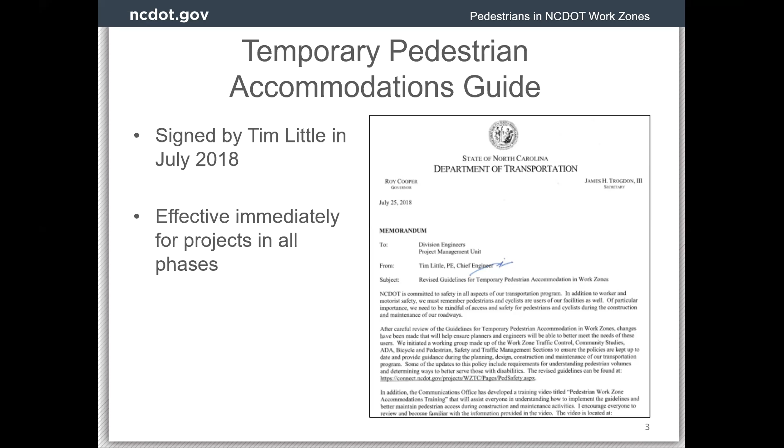The guidance focuses on using the actual level of pedestrians to guide designers towards or even away from specific pedestrian control strategies. It requires active pedestrian movements be maintained throughout construction, and it requires the use of ADA-compliant traffic control devices to close or guide users through, along, or around a work zone. These are also requirements set forth in Chapter 6 of the MUTCD, which states that the TTC, temporary traffic control, if the TTC zone affects the movement of pedestrians, adequate pedestrian access and/or walkways shall be provided.

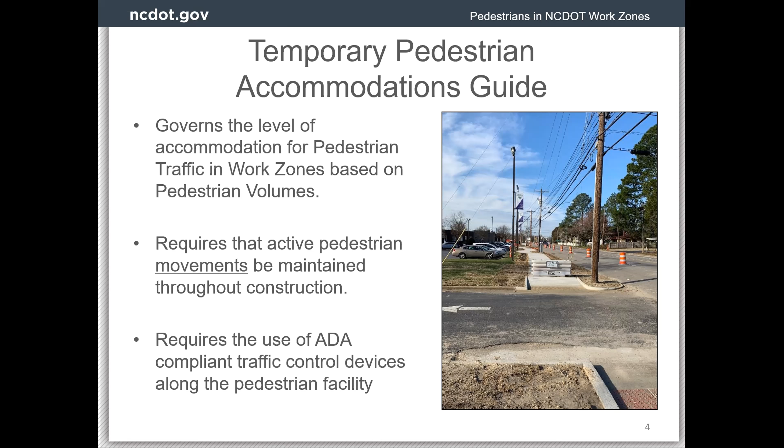So let me elaborate for a minute on pedestrian counts themselves. The intent is that this number is known as early as possible. Some community studies findings will prompt the ordering of pedestrian counts, but they can be requested anytime through the Connect NCDOT traffic safety website. They have to be approved, and are usually turned around in about 2 weeks after approval. Also, we suggest ordering counts when the perceived volume of pedestrians is high, not when it's very low.

So to explain that, we don't expect that every project with an existing facility needs pedestrian counts. If there's a continuous existing facility, the project must follow basic pedestrian requirements at a minimum already. Basic accommodations cover a volume of pedestrians up to 99 per day, give or take. So counts should be ordered when it looks like there may be enough volume to push the project to a higher level of accommodation. But if in doubt, definitely order counts.

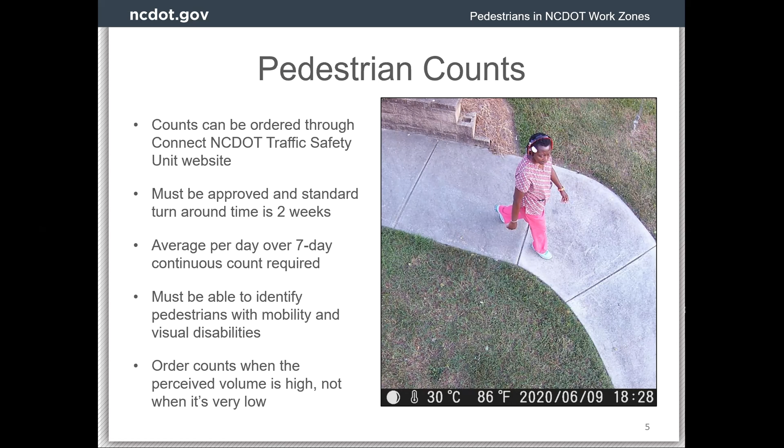So, determining the level of pedestrian accommodation. Once the counts have been completed, based on the volumes, the project will fall into one of 4 levels of accommodation. As you see here on your screen, the levels are absence of need, basic, moderate, and full, and then their corresponding numbers are next to them as well.

Absence of need only occurs when there is no existing pedestrian facility and no evidence of pedestrian activity. But also, if there are any continuous existing facilities, then the project must follow basic accommodations at a minimum, regardless of the activity levels. On this screen, the picture, that red block is the 24-hour average pedestrian volume for a project that had pedestrian counts ordered here in Raleigh. So this is just the front page of that report that the traffic counters send to us.

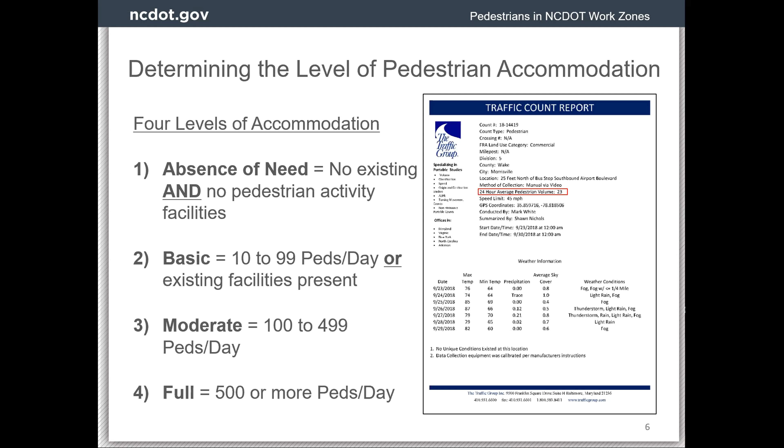I also want to state that the guidelines are currently undergoing an update. It's the first one since 2018, and hopefully it'll be published before the end of this year. The major changes include a clearer definition of determining the absence of need, better guidance for when to and when not to order pedestrian counts, and guidance for the use of audible warning devices in the work zone.

These guidelines were a huge accomplishment by our pedestrian task force, and I do want to take a moment to brag on the force for a minute. As you can see here, we tried to make sure we got the input of several different units and had many perspectives brought to the table.

Currently, we meet every 4 to 6 months, but it was monthly during the development of the guidelines. We discussed project-specific implementation, further improvements to our current processes, and new initiatives. Keep in mind that if at any time anyone has anything they want the task force to work through or discuss, contact Work Zone Traffic Control and we will bring that group together.

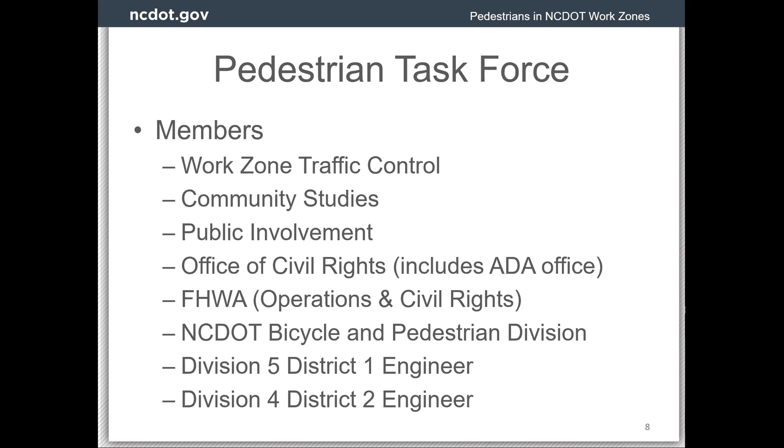So the goal of accommodating pedestrians in the work zone is reached by constant collaboration throughout the entire project delivery process. There are a few units that I want to speak about that weigh heavily in this effort.

Community studies conduct site visits, complete screening tools, and document the presence, the nature, and the volume of pedestrian activity. Their findings are distributed through community impact assessments or community characteristics reports. Community studies can also trigger pedestrian counts to be ordered for a project.

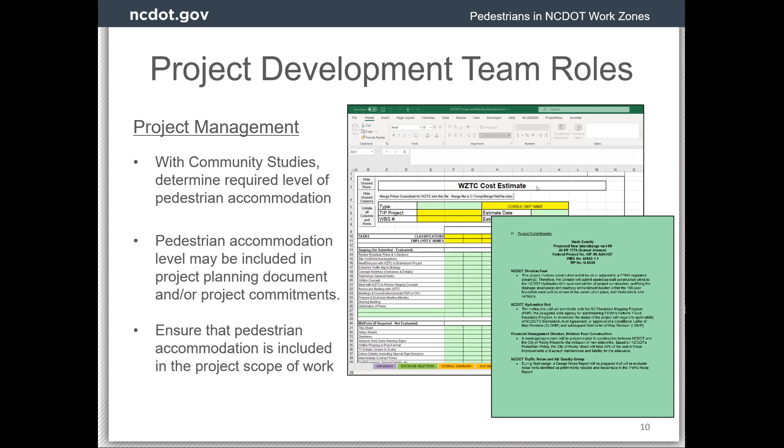Project management, with community studies and sometimes us in Work Zone Traffic Control, will help determine the required level of accommodation for the project. Project documents and commitments may include the level of pedestrian accommodation, and we also make sure that the time expected to be spent on pedestrian accommodations in the TMP is captured in the scope of work and man-day estimates, just so it's on the table up front and the TMP designer knows what they have to include.

Then we have our TMP designers. They're responsible for incorporating the proper strategies and devices for the determined pedestrian accommodation level. We encourage all of our TMP designers to walk the project. Aerial views from Google, even dropping the man down and going down the street, even on-site drive-bys, don't provide the same point of view as walking through it.

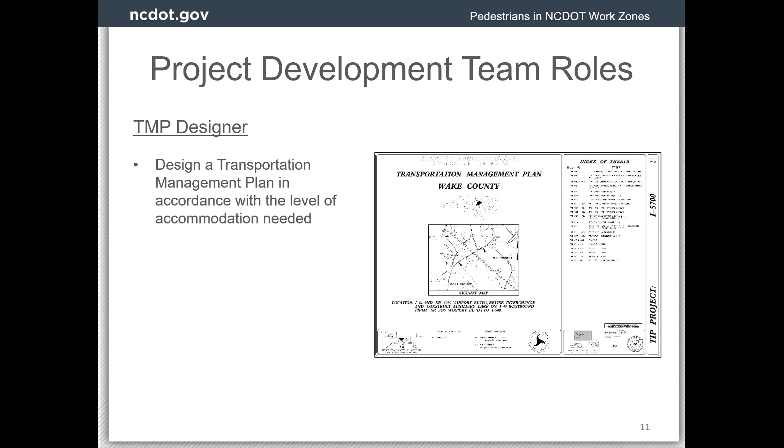Then while we're talking about TMP design, we'll get into some best practices and devices. As I mentioned before, absence of need only occurs when there's no existing continuous pedestrian facility and no evidence of pedestrian activity. Some projects will have no existing facilities or worn footpaths, but the plans will call for sidewalks to be constructed on one or both sides of the roadway in the final condition.

In these cases, at the beginning of construction, there won't be a need for any pedestrian accommodations, but in later phases of construction, there may be a need for possible pedestrian channelizing devices just to keep the sidewalks closed until continuity can be achieved.

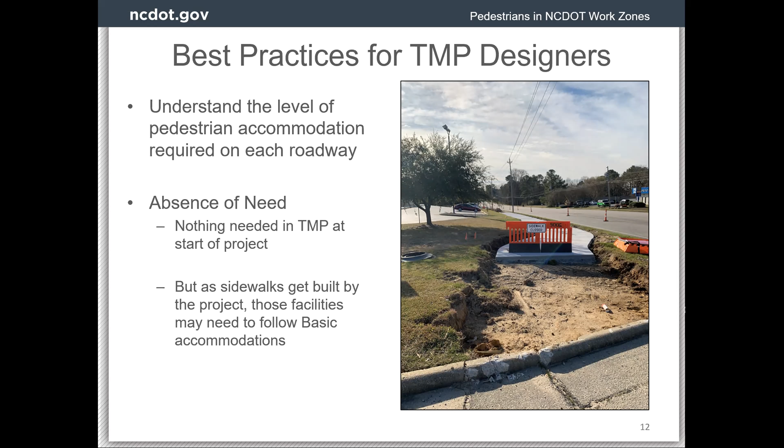Basic accommodations are for pedestrian volumes up to 99 per day. They'll typically employ either an off-site detour that must be within a half mile of additional travel distance, or an on-call pedestrian transport service. Also, when feasible, we'll build the proposed pedestrian facilities without having to disrupt the existing ones. While basic accommodation is the least intensive level, it's also the most common that we see on our projects.

The pictures on this slide show an ADA compliant barricade on top and a type 3 barricade on the bottom. The reason the type 3 barricade is not ADA compliant is the lack of a bottom rail within 2 inches of the ground to provide detectability for a visually disabled individual using a wanding device, and because the legs or the sandbag support in this case pose a tripping hazard that would not be seen by a visually disabled individual.

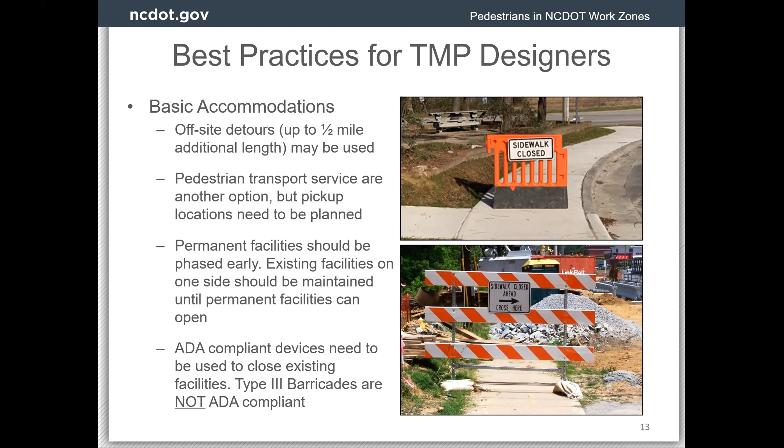Moving to moderate accommodations, which is for more than 99 and less than 500 pedestrians per day. It becomes more important to maintain the existing facilities and keep pedestrians on site. Once the existing facility is disrupted, we must provide other accommodations, which becomes more challenging as the number of users increases. Without any other feasible options, an off-site detour would be allowed at this level, as well as a pedestrian transport service, but it cannot be on call. It must operate at regular intervals.

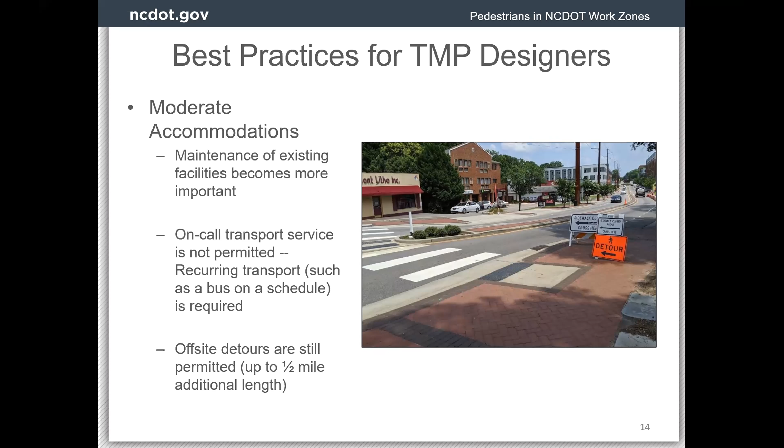Then we have full accommodations for volumes of pedestrians more than 500. Pedestrians should be maintained on site at all times. Off-site detours are not an option at this accommodation level. Also, any pedestrian facilities constructed or used during construction must meet current ADA standards, and the TMP may even require the contractor to complete some ADA upgrades as part of the first phase. A transport service would be allowed for this level, but with a 20-minute continuous operation schedule.

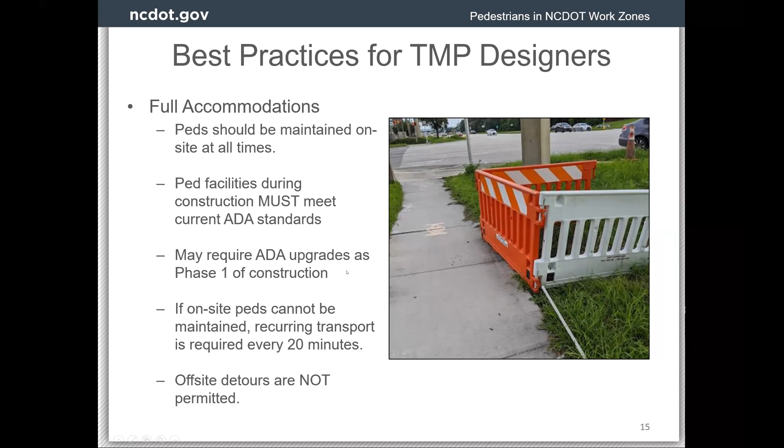So let's look at an example. This is a project currently under construction on Airport Boulevard over I-40 in Morrisville, right near RDU Airport. The project is constructing a diverging diamond interchange, and while the existing condition did not have sidewalk crossing the bridge itself, there was sidewalk to the south near the project, and pedestrians were often observed walking across it and within the project limits.

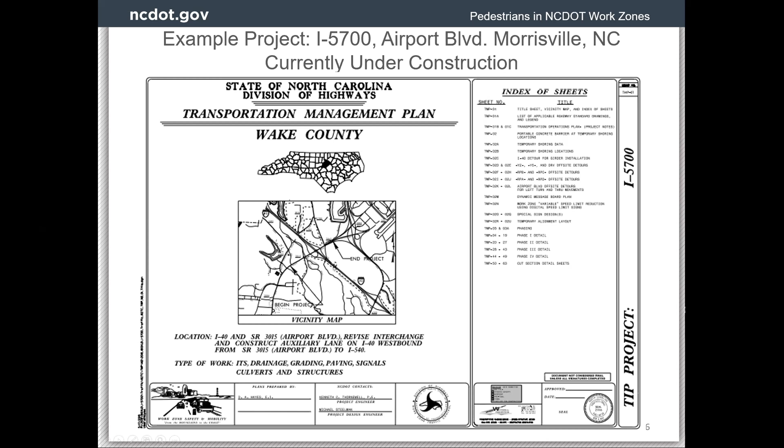So this is just the title sheet for the transportation management plan, and this is the existing condition. As you can see here, there's sidewalk on this side, and this is outside of the bridge, but still within the actual project limits.

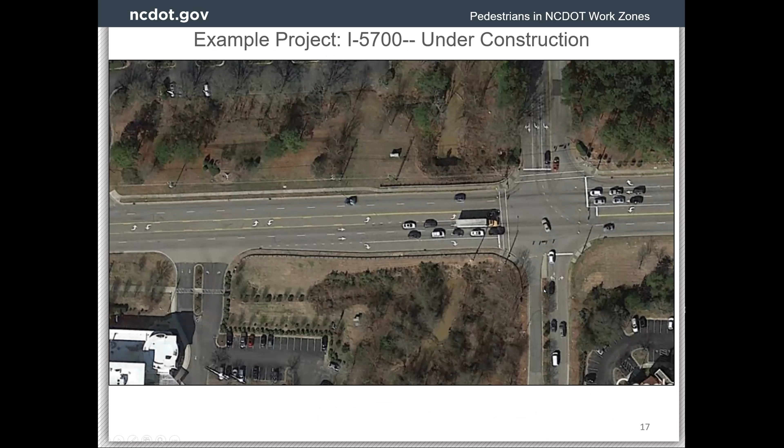This is one of the plan detail sheets. In phase 1, to meet the basic level of accommodation that was determined, the TMP designer elected to close the sidewalks. The existing ones up here were closed, and they built a temporary sidewalk, which is this gray honeycomb shape near the middle of your screen. That is temporary pavement that will be used as a temporary sidewalk later. So while this is being constructed, the pedestrians are being maintained by a pedestrian transport service.

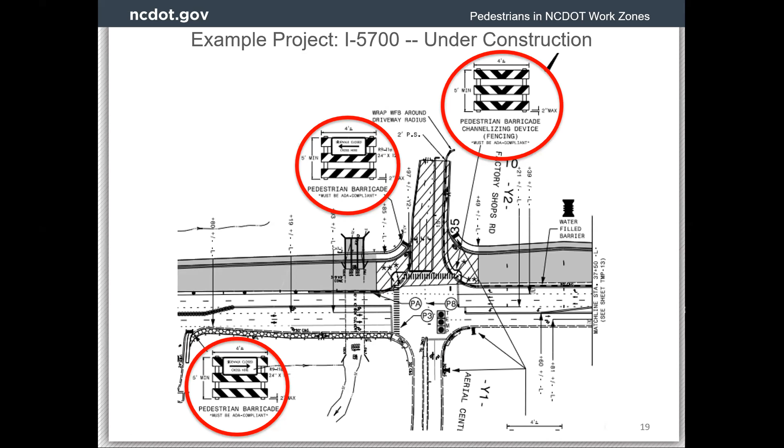Okay, let's move on to special provisions. All of our special provisions for work zone traffic control, including the pedestrian applicable ones, ADA compliant pedestrian traffic control devices, and pedestrian transport service, are available in our WASP program, which is launched from our Connect Work Zone Traffic Control website. Always launch WASP from the website, since that will give you the most up-to-date documents and make sure you don't have any old ones.

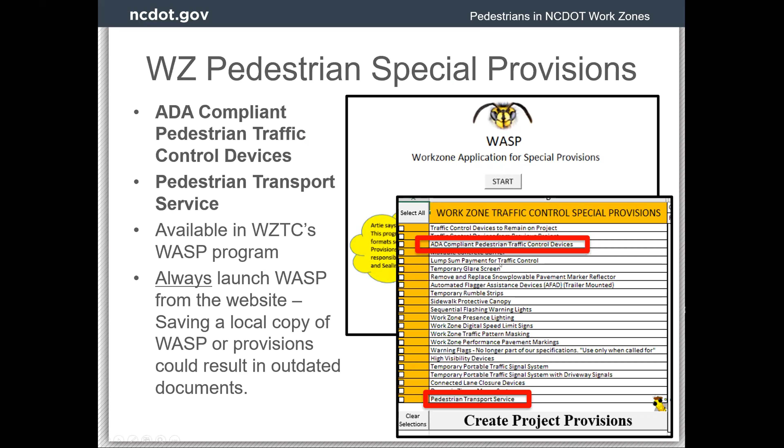So ADA compliant pedestrian traffic control devices, pedestrian channelizing devices - these are the barricades that you see that will close the sidewalk or help direct or guide users around or through the work zone. Again, these are not type 3 barricades, they are different. As you can see up here, they do have the rail on the bottom that's within 2 inches of the ground, and the feet are on the back end, or the support is on the back end of the barricade, so as not to pose a tripping hazard.

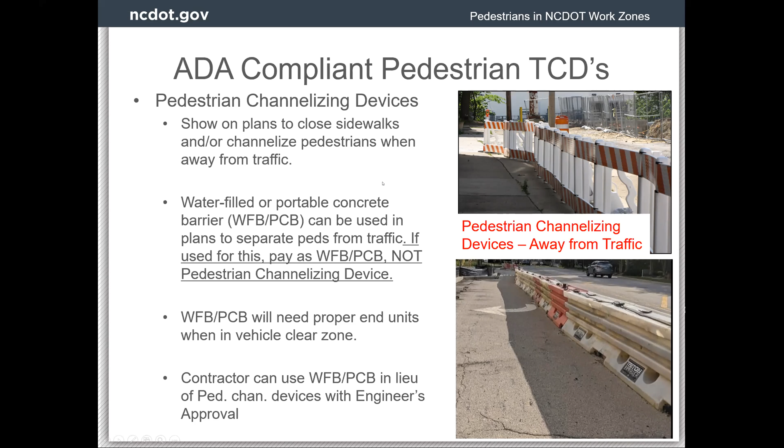Oh sorry, I didn't realize it had a graphic. There we go. Audible warning devices are another common device that we use.

It's able to be programmed to repeat a custom message after prompting. Some are motion detected, others have a locator tone so someone visually disabled can find it, hit the button, and hear the pertinent message telling them the sidewalk is closed, or whether they need to wait for a ride in the case of our pedestrian transport service, or other general information. We have a couple of audible warning devices approved on our list as well.

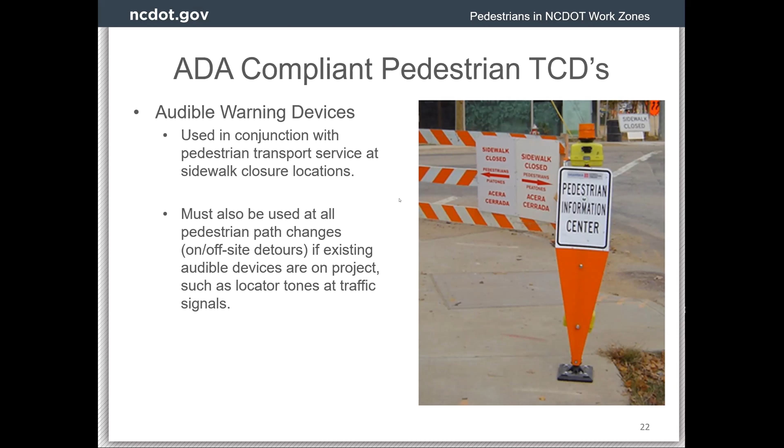The third device in that provision is temporary curb ramps, used whenever pedestrians must traverse an existing curb or other grade change without having to cut the curb itself.

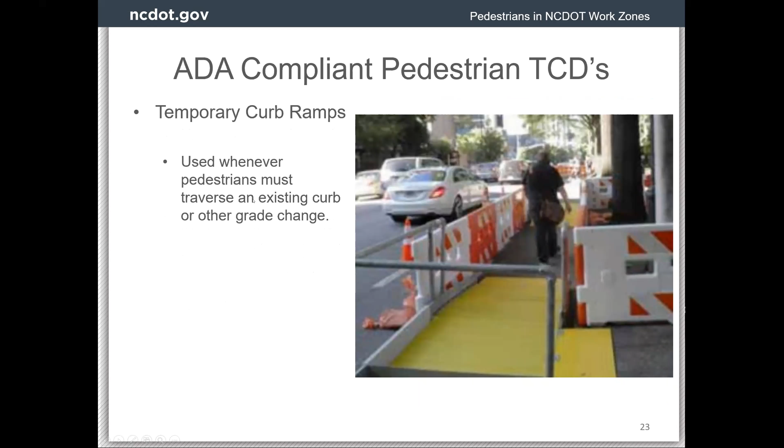The second one I spoke to, pedestrian transport service, meets the requirements for basic accommodations. Like I said before, moderate and full require a more regular service that will likely need a dedicated vehicle.

This is a sample sign used on a project here in Raleigh, the I-440 US 1 widening. This was on one side of a bridge that was being replaced, and pedestrians were able to call the number on here, give their account number, and receive a ride to the other side of the bridge to give them that access.

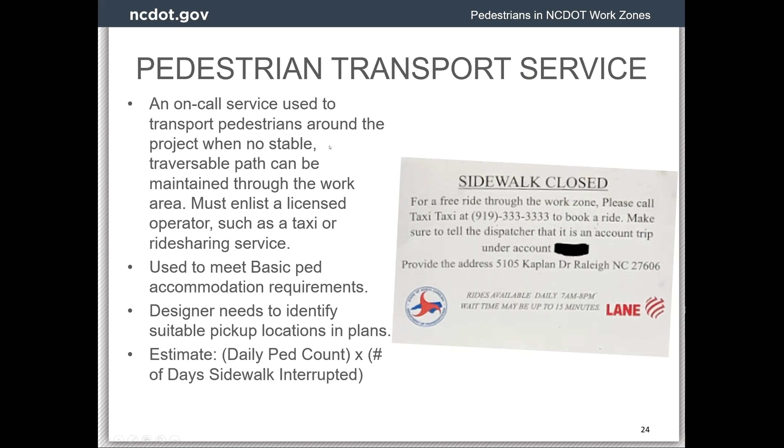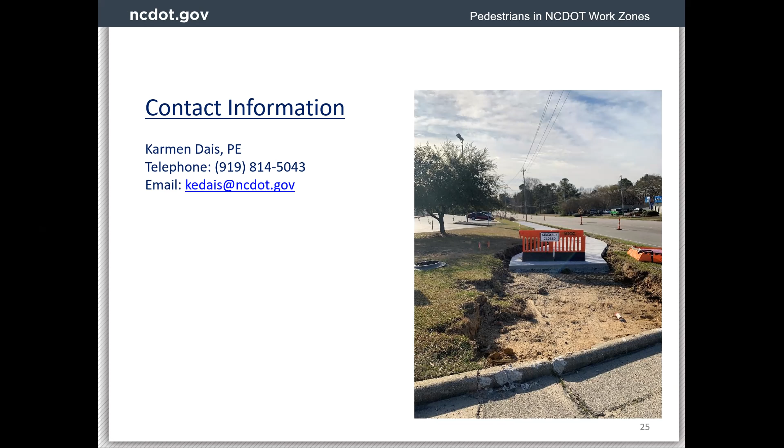Thank you, Karmen. Great presentation. Okay, we have a question in the chat box: how much is the additional cost for building and maintaining the sidewalks?

For building and maintaining the sidewalks? It varies. Pedestrian barricades, we've seen them range anywhere from $50 to $150 per barricade. I don't know the cost of concrete necessarily. If you're providing an offsite detour, it's fairly inexpensive because it's just the barricades, depending on how many you use. A pedestrian transport service, we've seen an average of $15 per ride, but it's also only paid per trip, so the cost is directly affected by the number of calls actually received.

As we know, most able-bodied pedestrians will walk around a barricade and won't necessarily use that service, but for those in need, they can absolutely use it. So I can't say there's a standard cost to maintaining pedestrians in a work zone. It varies—we haven't seen the same project twice. But if someone has a specific scenario they want us to look at, we definitely can.

Okay, and the second question is: do you see many people using the pedestrian transport services? So that's kind of what I addressed before—we know able-bodied pedestrians probably won't use it. If there's an opportunity for them to reach their destination by going into the road or something else without having to wait for a ride, they will do that. We're aware of that, but that's certainly not our intent.

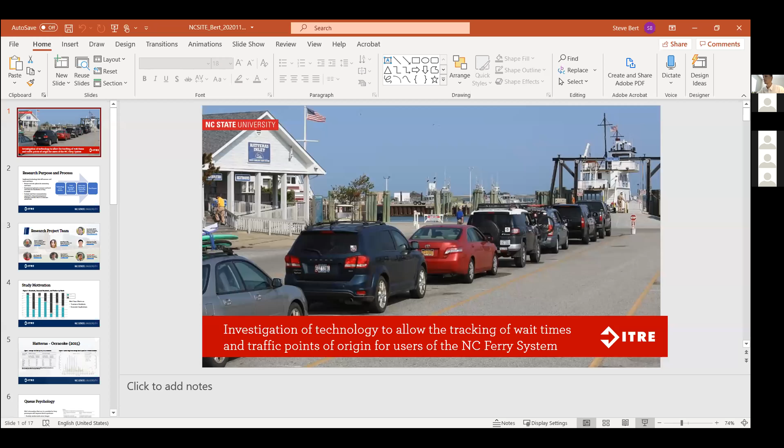Well, thank you for that introduction. As Lee mentioned, I'm Steve Bert. I work at the Institute for Transportation Research and Education at North Carolina State University, and it's great to be here with all of you today. The primary purpose of my presentation is to discuss a research study we were commissioned to undertake by the North Carolina Ferry Division.

So just a little bit about our ferry system: it transports over 800,000 vehicles and 2 million passengers a year, making it the second largest state-run ferry system in the entire United States. It provides critical support to our coastal islands, and in some locations, ferry transportation is the only option for reaching, for example, the island of Ocracoke. Reliable ferry wait time prediction allows for improved ferry service scheduling, multimodal transportation coordination, and proactive trip planning.

That's really what I'll be getting into today: what technologies can we use to evaluate and test options for measuring wait times? How can we devise a system that can be readily implemented for ongoing wait time measurement? And what are some opportunities to analyze and operationalize demand management strategies?

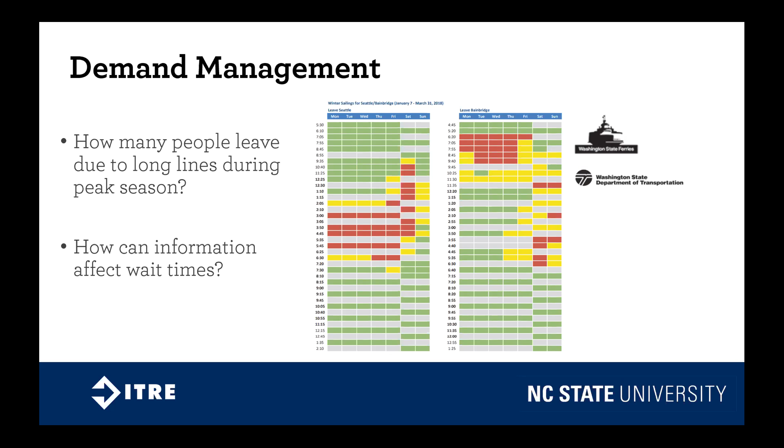One of the things that offers an ability to know wait times: the Washington State Ferry System provides projected wait time conditions and allows customers to view real-time video for current wait time conditions. A primary goal of our research is to provide the ferry division with an implementable technology to consistently and accurately measure wait times, and to use this information to broadcast wait time information to the public.

There are 3 approaches that can be used to measure wait times. These include queue length measurement, fixed point vehicle re-identification, and dynamic vehicle tracking.

Queue length measurement technologies are employed to measure the arrival and departure rates of vehicles and estimate the number of vehicles in queue. This estimate is usually based on a measure of the length of the queue and an approximate average of the density of vehicles within it. This data is fed into an algorithm that estimates the time the next vehicle will be arriving at the end of the queue, as well as the time to move through the queue.

A couple technologies: there are inductive loop detectors that can be installed underneath the pavement at key queue locations to measure arrival and departure rates. There are ranging radar detectors that can be used or substituted for inductive loop detectors. And also just video camera technology can be used to track the movement of vehicles in queue.

There are also fixed point vehicle technologies that are used to identify the time it takes for a vehicle to travel from point A to point B. Wait times are calculated by getting a timestamp for when the vehicle first arrives and another timestamp for when it departs. RFID and license plate reader technologies can be used to achieve this result.

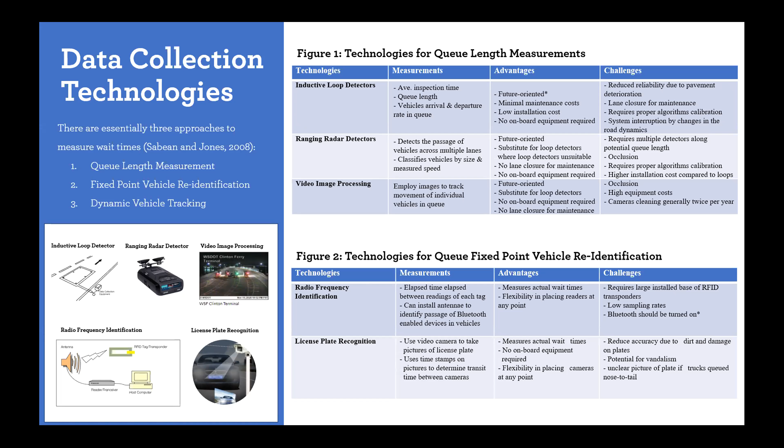The way this works: you can post up an antenna which will scan for Bluetooth enabled devices in vehicles, and the elapsed time between Bluetooth readings can be used to estimate wait times. Similarly, license plate reader video camera technologies can be used to take a timestamp of a vehicle reaching point A, and then take another timestamp when it reaches point B. The elapsed time can then be used to estimate wait times.

Additionally, dynamic vehicle tracking technologies use some form of wireless signal to determine the location of a vehicle at multiple times along its route. There are multiple segments that can then be analyzed within the queue, and the elapsed time from segment to segment is summed to produce the wait time. Cell phone tracking and global positioning systems, GPS, can be used for this method.

So what our team did, we took all this information that we gathered from our literature review, and then we weighed the pros and cons, advantages and disadvantages, of the data collection approaches and technologies. And we decided to pursue the use of technologies for queue fixed point vehicle re-identification.

We have been testing Bluetooth and license plate reader technologies, using normal video camera processing to validate our results. Our initial test with Bluetooth demonstrated that the technology has some limitations that would likely need to be overcome before this method could reliably estimate ferry wait times.

We found the technology is not quite as pervasive as we anticipated. Bluetooth is often disabled or not discoverable on smartphones, and it's not widely available enough yet in all vehicle models. So our initial Bluetooth trials have resulted in not enough vehicle tags being identified to accurately measure queue dynamics.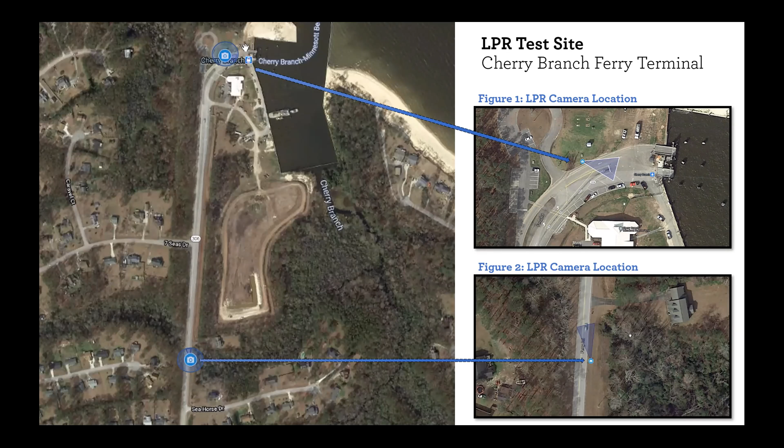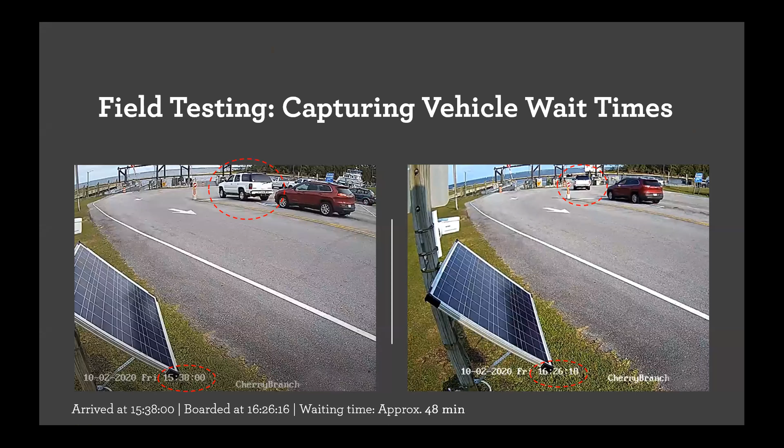You can see here the license plate reader technology at work. For example, the white SUV arrived at 3:38 p.m. and boarded the ferry at 4:26 p.m., an approximate wait time of 48 minutes. So, rinse and repeating with this process, you can see how we would replicate this for all the vehicles coming through.

For our field test at the Cherry Branch site, we collected a total of 46 video clips during our LPR test pilot. We have a video camera that is also being used to manually validate our readings, and a spreadsheet tool we're using to track when a vehicle enters and exits the queue. Though we're still in our validation phase, our next steps would involve refining our existing system and then expanding to other terminals.

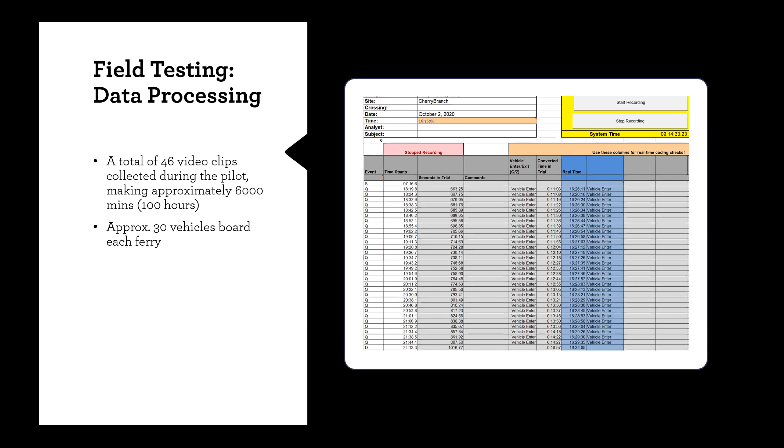Bringing it all full circle, the North Carolina ferry system is truly essential for connecting North Carolina residents and visitors to work, medical, school, and tourism destinations. The ferry system facilitates over $730 million in economic output, or $730 million annually in business sales, by connecting people to the commercial destinations they seek. The ferry system is an integral component of the tourism industry in the Outer Banks.

In 2015, we found that approximately 9.3% of vehicles traveling during peak conditions from Hatteras to Ocracoke turned around and left, exiting the queue and deciding not to board at Hatteras for Ocracoke. Based on research findings by Letchworth et al., this equated to approximately $375,000 in lost revenue for Ocracoke businesses.

In conclusion, reliable ferry wait time prediction allows for improved ferry service scheduling, multimodal transportation coordination, and proactive trip planning. Best practices in queue psychology could be applied to improve customers' wait time experience, and wait time information can be communicated to improve demand management. We are currently studying ferry wait times with a fixed point vehicle re-identification approach and technologies. Our study results are scheduled to be completed July of 2021.

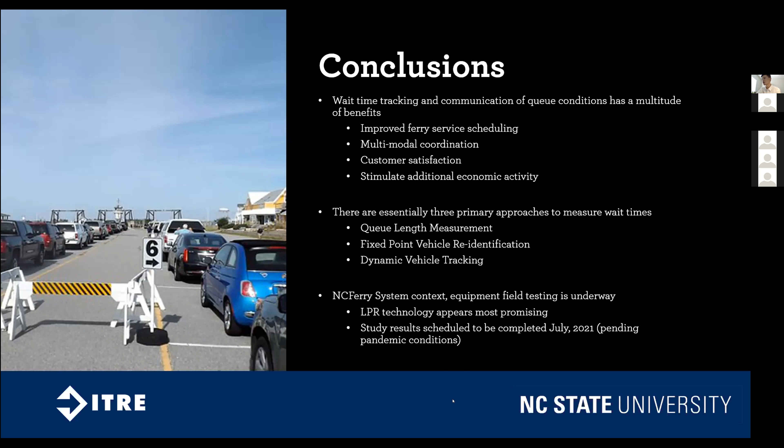Okay, the next presenter is Corey Hill. Corey Hill will give his speech on Transforming Rail in Virginia, North Carolina, and the District of Columbia.

Prior to joining Kimley-Horn in September 2016, Corey worked in the public sector for 23 years, serving in all levels of government. His areas of responsibility have included everything from developing multi-billion-dollar railway system and transit projects to developing and managing some of the highest priority rail and transit programs in USDOT and the Commonwealth of Virginia, such as the $10 billion high-speed intercity passenger rail program.

and the $2.6 billion Dulles Corridor Metro Rail Extension Project. He served in several executive level positions, including Chief of Transit and Agency Director for the Virginia Department of Rail and Public Transportation, and as the Director of Program Delivery and Executive Director for the Federal Railroad Administration. Now at Kimley-Horn, he runs a rail transit and strategic planning practice and leads Kimley-Horn's program management team for Virginia's $3.7 billion Transforming Rail in Virginia program.

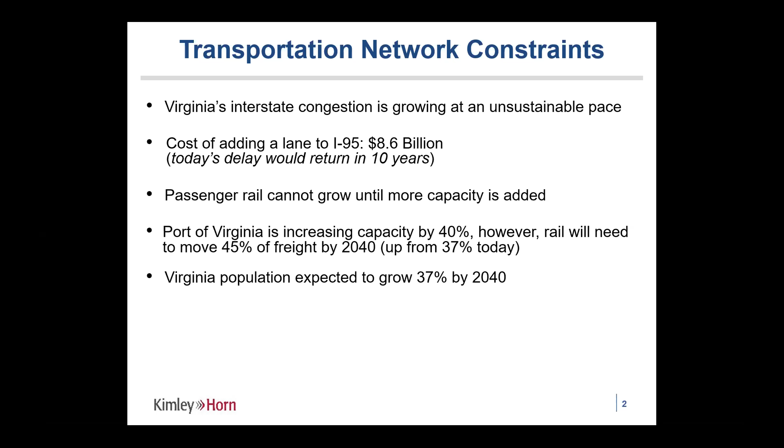And then finally, they started to look at Virginia's population and realized that the growth rate of 37% by 2040 was going to overwhelm the system even more. So now I'm going to focus a little bit more on that rail aspect and those constraints there.

So when it comes to North Carolina, Virginia, and the District of Columbia, they all have this same problem, that passenger rail cannot grow. And the reason for that is that there is one of the biggest rail bottlenecks on the entire East Coast, located at the connection between Virginia and the District of Columbia. That bottleneck is called the Long Bridge Corridor.

Where the railroad network has 3 tracks on one side of the bridge. The bridge itself is 2 tracks, and then it goes to 3 tracks on the other side of the bridge. And that bridge is currently at peak capacity during the morning and evening rush hours. So there's no more capacity available to take trains over the bridge.

And so if North Carolina or Virginia or the district wants to put more trains on those tracks to connect to the Northeast Corridor, it's simply not possible without capacity. Literally all traffic funnels over this bridge, and the next opportunity to cross the Potomac River is actually 75 miles away. So there's no other near-term options than this one particular spot.

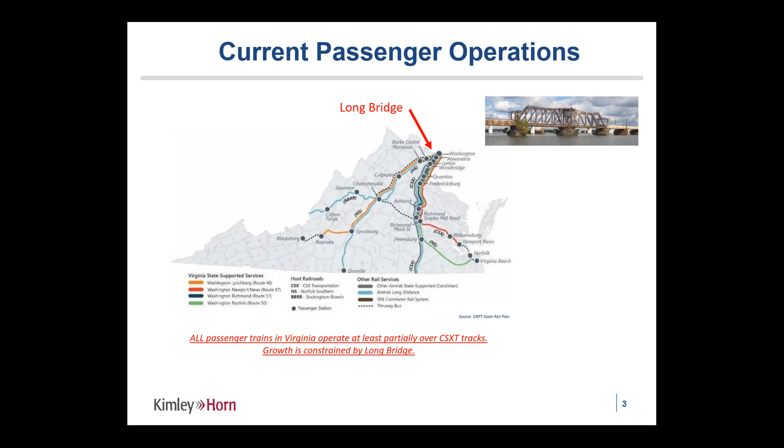So Virginia got together with CSX. CSX is the private railroad that owns the Long Bridge, and said, hey, we need to figure this out, because we're not going to be able to invest billions of dollars in highways. We need more capacity out of our rail network, both passenger trains and freight trains. How do we do it?

And for CSX, it's a difficult decision for them because about 70% of the traffic over the bridge is passenger traffic, and only about 30% of the traffic is their freight traffic. So the parties got together in 2019 and worked out a partnership that they announced last December. That partnership, announced by Governor Ralph Northam and Secretary of Transportation Shannon Valentine, was a $3.7 billion landmark deal with CSX that I'll walk you all through here.

So the major features of the deal include Virginia acquiring right-of-way and track from CSX. CSX is at one of those rare moments of time where they are rationalizing the railroad network. They've run about 19,000 miles of rail in the United States, and they decided that they didn't need to build more. They actually were ready to get rid of some of their existing rail networks, and Virginia thought that would be an opportunity for them to step up and take a leadership role.

So in the I-95 corridor where congestion is the worst, they're looking at buying half of the rail corridor, splitting the corridor with CSX all the way from Washington, D.C. to Petersburg. And then from Petersburg to Ridgeway, North Carolina, they would buy the entire corridor. That's an abandoned rail corridor. It doesn't have any tracks, but has the right-of-way available. And then there's another major east-west corridor from Doswell, Virginia to Clifton Forge, Virginia, that they would buy the entire corridor there as well.

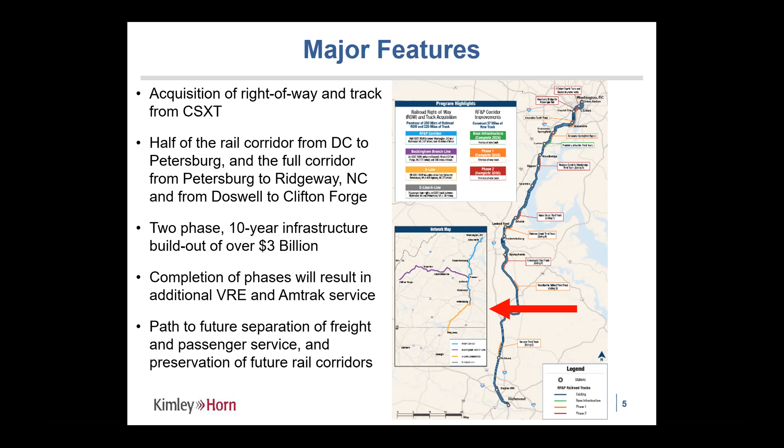Once they purchased those corridors, they would then make improvements, especially in the I-95 corridor, to build out that capacity and start to fix some of those pinch points. And that, of course, is what would result in what they're really after, which is more service, more passenger service, both Virginia Railway Express commuter rail service and Amtrak service, while at the same time preparing themselves for future growth in the other corridors.

So a little bit more specifics on all of those major features there.

In terms of acquisition, we're talking about 140 miles of right-of-way and 37 miles of existing track from DC to Petersburg. CSX is going to retain enough right-of-way to have a 2-track corridor for themselves, and then sell enough right-of-way for Virginia to have its own 2-track corridor.

Along the Buckingham branch line, from Doswell to Clifton Forge, it's 170 miles of right-of-way and track. It's a functioning corridor that's already active, although it's mainly a freight corridor and hasn't really taken advantage of passenger rail yet. And then lastly, there's 70 miles of abandoned corridor from Petersburg to Ridgeway, North Carolina, that they're looking to secure for the future.

Virginia, at the same time, is talking with North Carolina, who recently announced that they got a federal grant to help purchase right-of-way from Ridgeway, North Carolina, down to Raleigh, making that connection between Richmond and Raleigh.

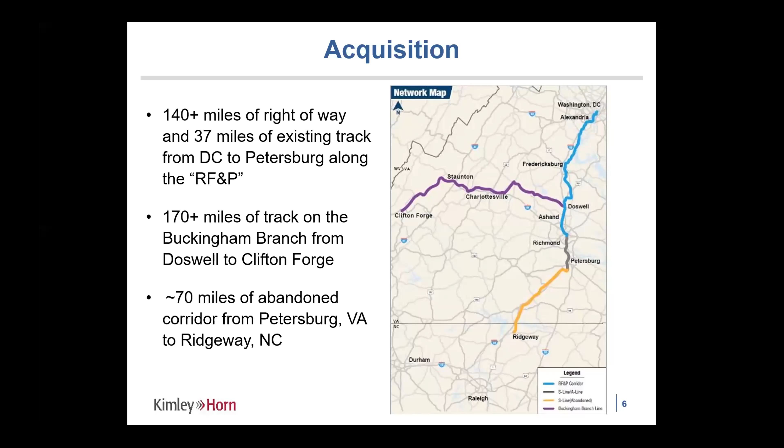In addition to acquiring the right-of-way, the next step is to figure out how to make improvements to allow that capacity to produce more service and eliminate some of the bottlenecks and problems that Virginia and the District and North Carolina are all facing today.

The improvements amount to $3.2 billion, broken into 2 major phases. The first phase would be completed in 2026, and it involves building mainline track. Where there's maybe 3 tracks on the ground today, they would add a 4th track. And other places where there's maybe only 2 tracks, they would add a 3rd track, and so on. So expanding the main line track is a big goal of the first phase.

In addition, 3 sidings would be built throughout the corridor to help in areas where trains would meet, and one train needs to be parked on the side in order to let another train through.

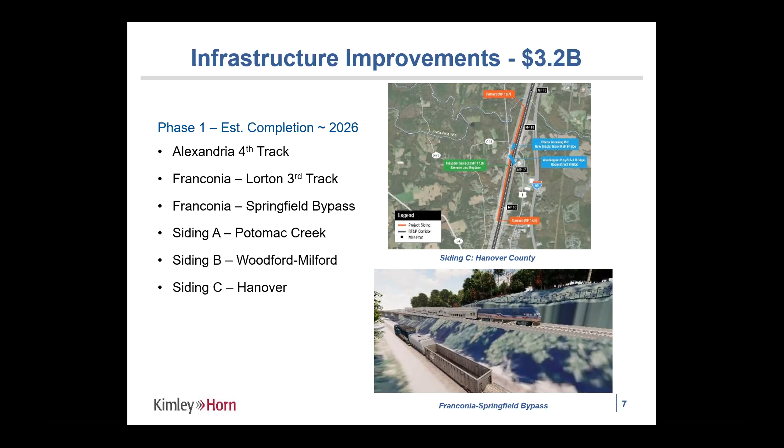The second phase involves Long Bridge. It involves getting rid of that major bottleneck that I mentioned. It would create a new Long Bridge, building a new 2-track bridge next to the existing 2-track bridge, creating a 4-track corridor in that area. On each side of the bridge, a 4th track would be built, and again, more sidings would be added into the corridor.

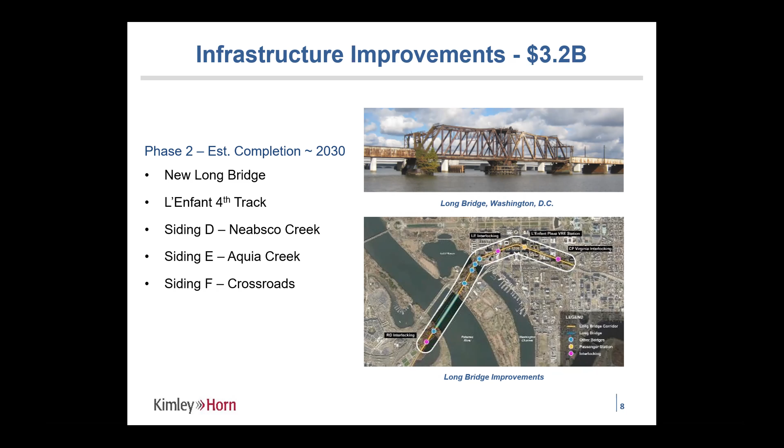When I talk about Long Bridge, it's actually more than just a single bridge over the Potomac River. It's a whole series of structures, about a 1.5-mile long corridor connecting Virginia to the District of Columbia, involving 5 additional structures over roadways and the Washington Channel at an estimated cost of $1.9 billion. So 2/3 of that $3 billion program is just in this specific area alone.

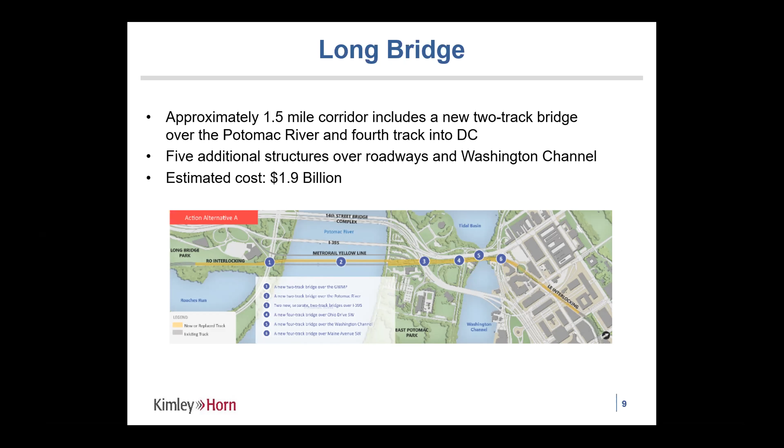As I mentioned, fixing those improvements, those 5 bridges in that area, is not enough to get you a fluid railroad. So the program involves building that 4th track on each side of that highlighted corridor, all the way between Alexandria and the district, in order to get a 2-track corridor in each direction for passenger rail and for freight rail.

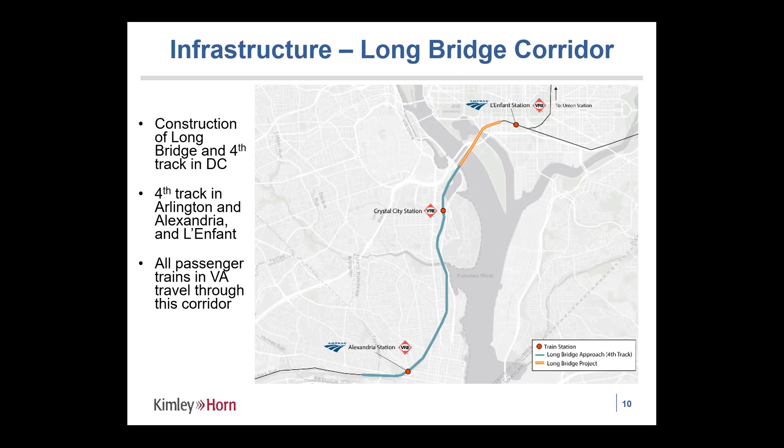This will allow us to separate those services, which is a really unique aspect in railroading. Often railroads run in a mixed traffic environment. Here, you're clearing the way for freight trains to run unimpeded in this area, as well as passenger trains to run unimpeded.

Further south, that 3rd track comes into play, all the way from Franconia to Springfield down to Lorton, and includes that bypass that I just described.

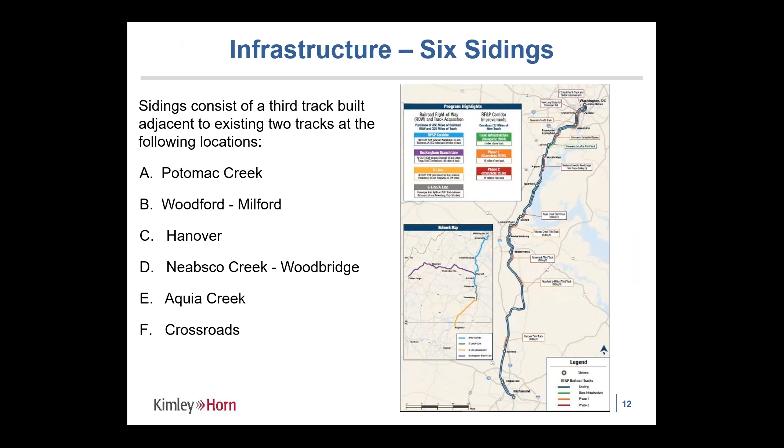And then again, we've got the six sidings that are spread throughout the corridor to provide additional capacity and allow trains to move fluidly as they need to get around each other in some of the southern areas of the corridor.

As much as this deal sounds like it's about infrastructure and building new projects, it's really about service—that's why Virginia is after this. They needed more train service in the corridors, and they needed to find a way to make that happen.

With the investments I just described, the outcome is that they're going to be able to double Amtrak state-supported service between Washington, D.C. and Richmond. That means near hourly service for Virginia in that section of the corridor. It also increases service to Hampton Roads, both in Norfolk and Newport News.

For their commuter rail service, the VRE, it also increases that service on the Fredericksburg line, the line in the northern Virginia part of the corridor, by 75%, and includes new late night service. Their other line, the Manassas line, also in northern Virginia, can also increase its service through this deal. And most importantly, weekend service can be added for the first time ever.

So what you're really talking about here is a dramatic expansion of Amtrak service, as well as taking what is a commuter rail operator—a train service that runs only in commuter hours—and expanding it beyond commuter hours to give it a whole different footprint of service in the Northern Virginia community.

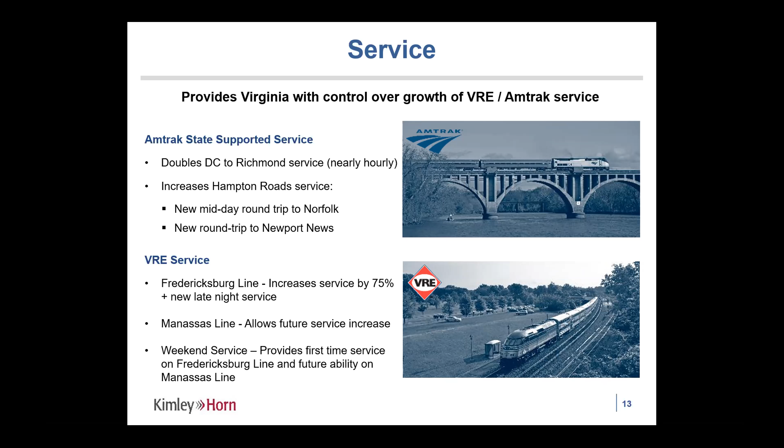The Amtrak service plan is going to add six additional round-trip trains. The important part here is spacing those trains out and resetting the schedule so that you've got frequent, reliable service, having a train every hour.

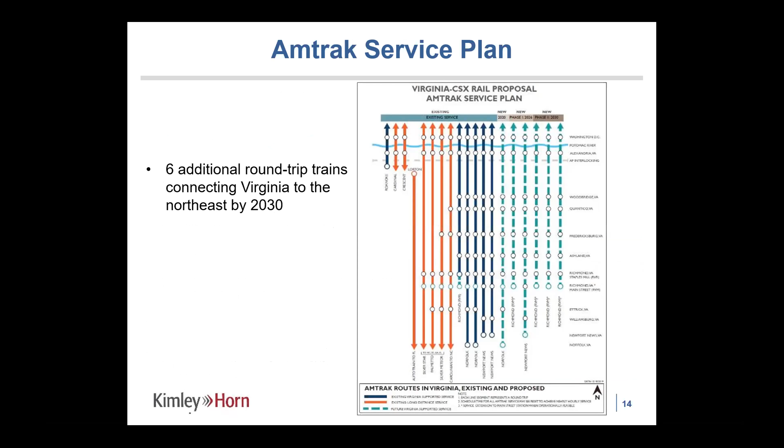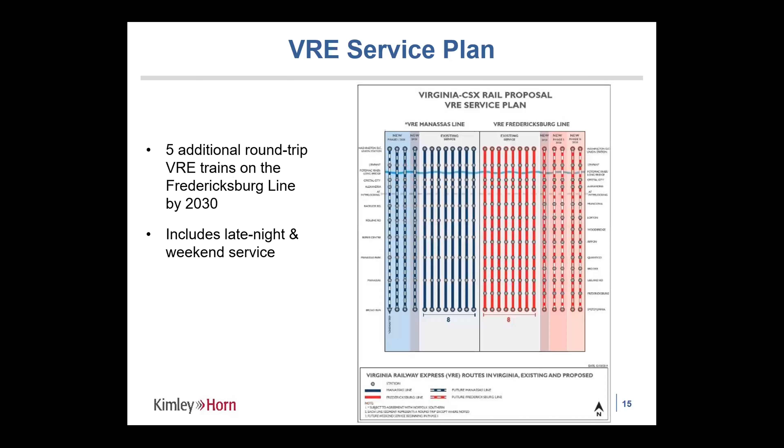For VRE, those five additional round trips we're talking about adding will allow VRE to put into service peak service at about every 15 to 20 minutes, so when it's needed at its highest demand point of the day, but also expand its service beyond that into late night and weekend service.

So with that, it's a lot that's going on in Virginia. It's going to benefit North Carolina tremendously, allow North Carolina to grow and proceed with its plans to grow that connection between Richmond and Raleigh, as well as ensure a connection for North Carolina and Virginia to the Northeast Corridor.

The announcement made last December was really on the business deal terms of the partnership. This year, Virginia's been working closely with CSX to turn that partnership into legal agreements, which is always challenging and complicated. They're finalizing the service agreements with Amtrak and VRE to make sure those schedules are put in place for that additional service to run when those improvements are made. They're refining the financial plan and securing the funding commitments from partners to make sure that $3.7 billion is completely lined up.

I will say that this program is a financially constrained program. Virginia has identified the money. Those funds are going to be available, and they are ready to proceed with this program. This is not a plan or a vision necessarily—this is a fully funded program that's going to be advancing as soon as these agreements are put into place.

And then lastly, they're going to continue working with CSX and other stakeholders to move the first round of projects forward in that first phase so that they can deliver service in 2026.